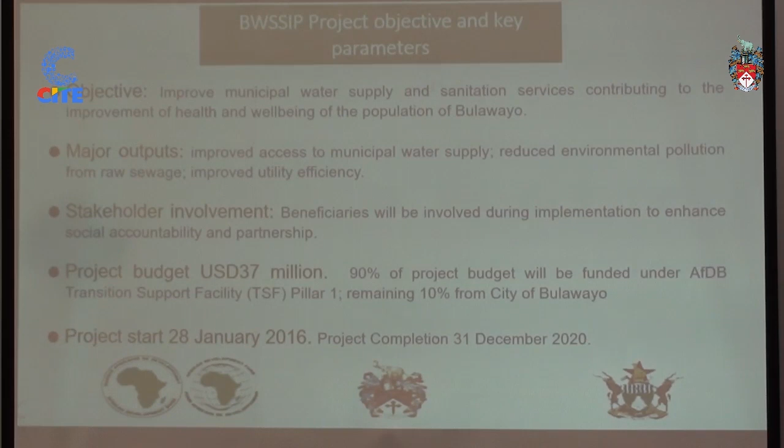The project budget is 37 million, of which 90% is contributed by the AFDB facility, and 10% is contributed by the city, mainly through our provision, mainly of offices.

The contribution is mainly in kind, provision of offices, the provision of our time on the project, like the PIT team that logs its time when working on the project. Also of major importance is the contribution by the community of Cowdray Park towards the laying of the sewers and water reticulation done within Cowdray Park. We'll get to details on that.

The project commenced on 28 January 2016, and the completion target is December 31, 2020, which is our target. So hopefully by this time next year, we should have closed this project.

The major outputs of the project include water mains renewal. I'm sure we're all aware that we continue to have serious bursts within our system. The project initially targeted 113 kilometers of water mains renewal, but because of funding constraints, that was reduced to 23 kilometers of renewal and only 2 kilometers of upgrading, mainly to meet pressure challenges especially in Nkulumane and Phumula.

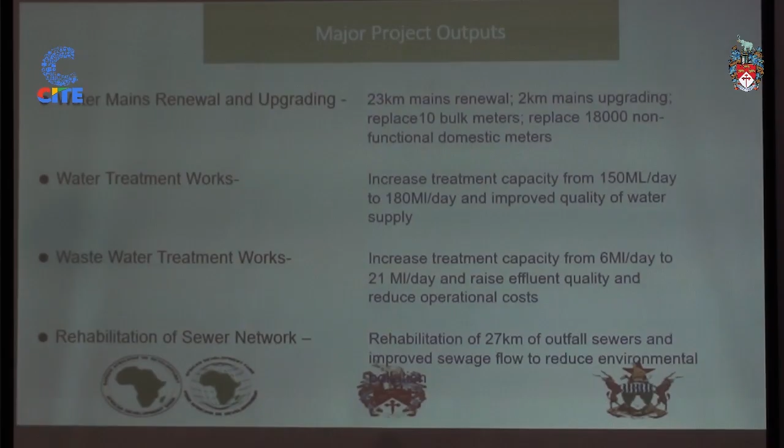It also aims to increase our treatment capacity at the area we call Southern Areas Treatment Works, Ekami, from a current 6 megaliters per day to 21 megaliters per day, and also improve operational efficiency. We're targeting the Ekami wastewater treatment works because the sewerage that goes there is actually domestic sewerage.

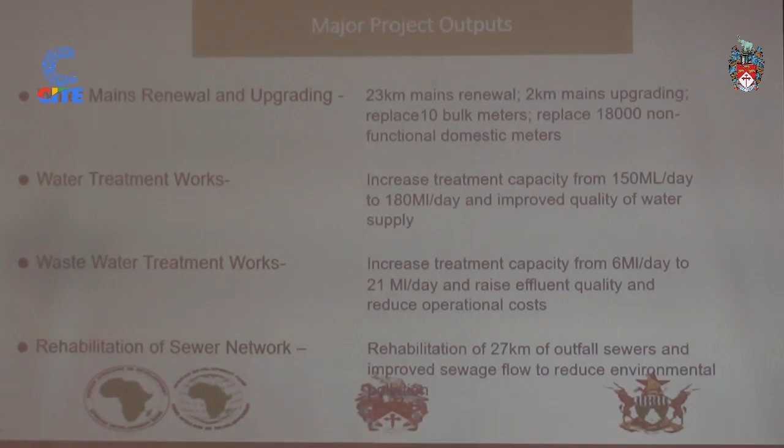There is potential to recycle these 21 megaliters of water for other uses. Within the project, a study will look at using secondary water for both agricultural purposes and as secondary water for industry in their processes. One targeted industry is the rehabilitation of the power station, which requires almost 11 megaliters of water per day. If we can harness 21 megaliters as reclaimed water, that means we will have saved 11 megaliters per day towards provision for domestic consumption.

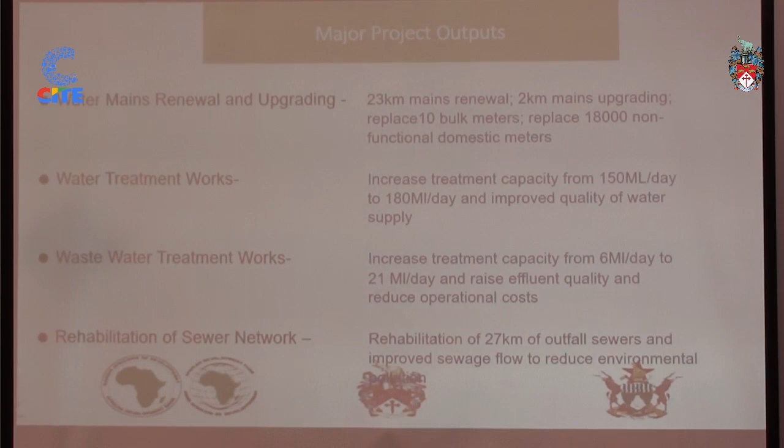The rehabilitation of the sewer network, of almost 27 kilometers of outfall sewer, will improve sewerage flow and reduce environmental pollution. So these are the major outputs of the projects going forward that we'll be looking at.

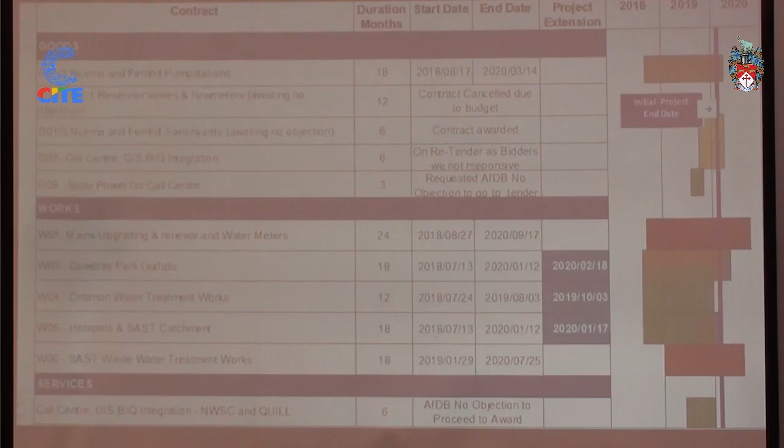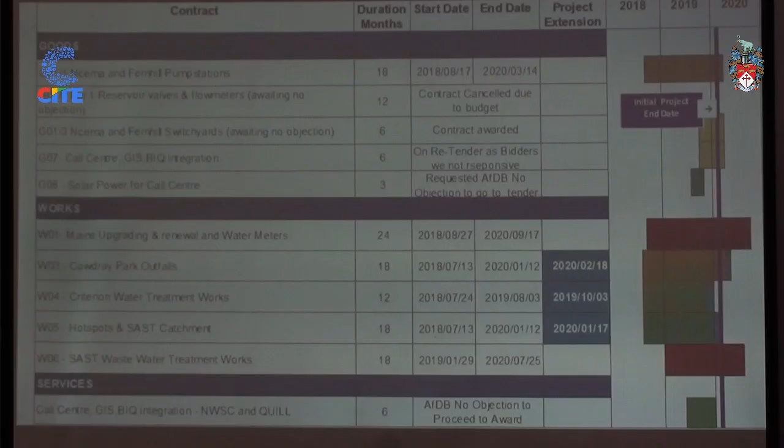Initially, the project was meant to end by 31 December 2019. What was spilling over was what was going into 2020, because that was our original target. But we're happy to say most of the contracts have been awarded. I'm sure you can see we're actually within the green and amber areas, meaning those projects should actually complete within the first quarter of 2020.

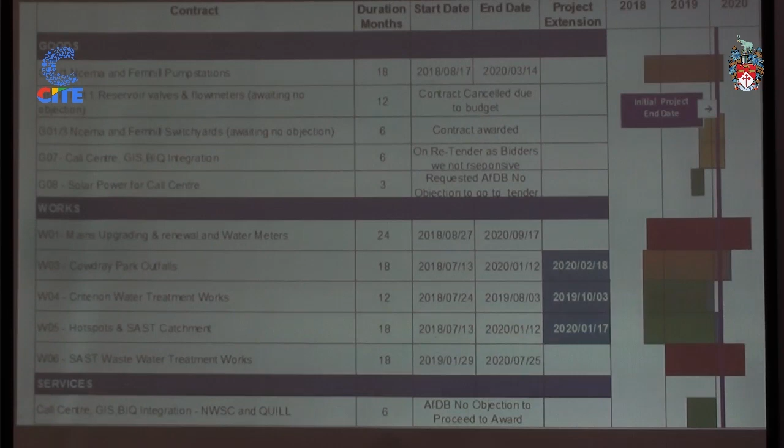The projects that are in the red will actually drag us at most to October 2020, meaning we will still be on target to close the project before the end of the project year, which is December 2020.

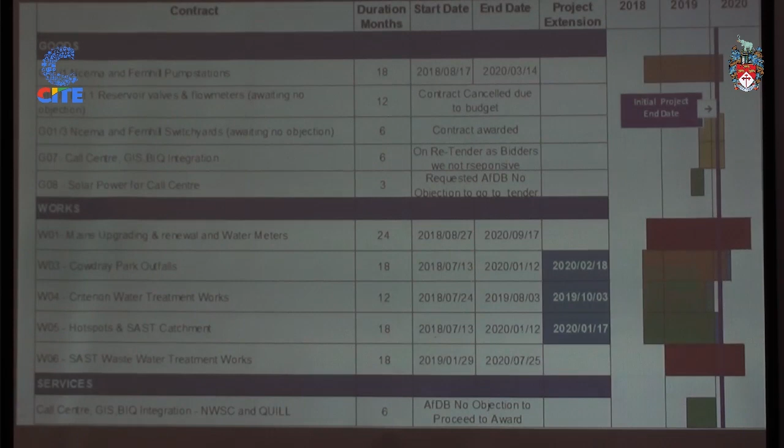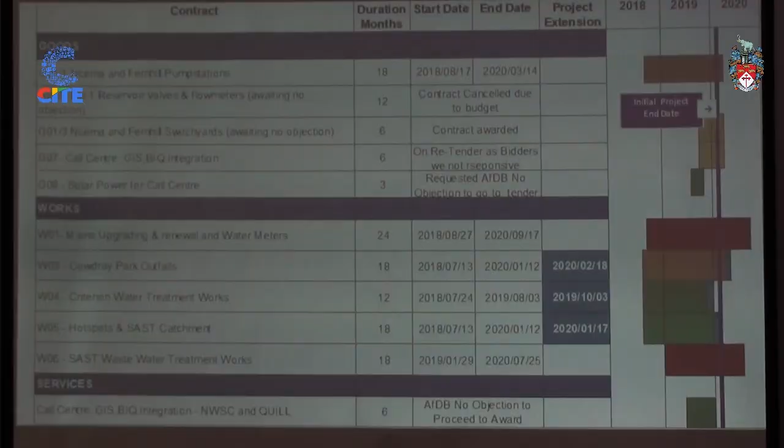G01/1 is mainly the rehabilitation of the water pumping system in Ncema and Fernhill. That was awarded, but its target completion is March 2020. Most of that work has to be done off the city because it's manufacture of those pumps, and those pumps are manufactured to specifications. We expect the manufactured pumps to be delivered before the deadline of March 2020.

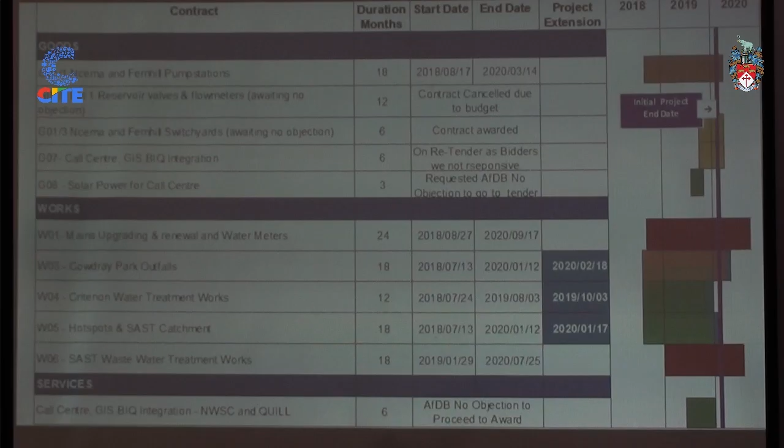The next project, where we're showing that our planned progress was 44%, we're currently at 16%. This is the water mains upgrading and renewal, and also replacement of water meters, which I'll dwell on when we come to that.

We targeted that we should be at 44%, but presently we're sitting at 16%, mainly because this is a non-revenue water strategy; we're trying to reduce the losses within the system. The project had a component where the contractor has to come on the ground, evaluate what the consultant has indicated as potential savings in terms of water losses, and confirm those studies by the consultant, which is probably why the project has taken a bit long.

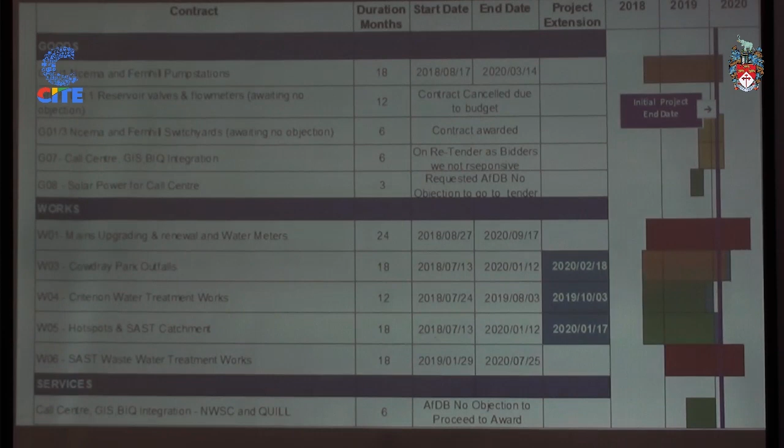But those reports have been finalized, and the contractor has been given the go-ahead to start on the implementation of the project. We expect that it will be speeded up to actually meet our completion deadline.

Then W05 is our project for hotspots in the Nkulumane Nketa area, looking at the amabhuma that we're seeing in those areas. Initially, the scope was that the project would look at the main outfalls within the Nkulumane Nketa area that feeds to Ikami water treatment works, and then do the hotspots across the city.

But again, because of financial constraints, the project was then limited to the Kami Sewerage treatment works catchment area. Hence most of the hotspots will be done in those areas, while the city, with its own internal funds, continues to do other areas using other resources, especially internal resources.

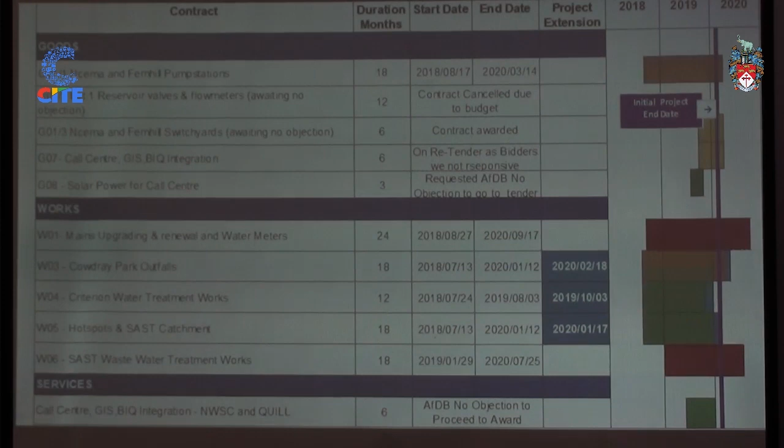Then W04 is our water treatment rehabilitation works at Criterion. That's a project that is on target, so we are almost 95% complete.

The implementation of the project will be slightly delayed. When we go out there after lunch, you will see the challenges we experienced. There have been requirements for additional works because of what was observed during the famous shutdown, which closed the water system for almost 7 days with people without water. Other works emerged that needed attention so the project is done to its full potential.

W03 is our sewer mains project in Cowdray Park, mainly to provide outfall sewers for the Hlalane Kuhle project. I've always said the Hlalane Kuhle project, compared to Gwanda, is 3 times the size. Our Hlalane Kuhle project covers 15,000 properties that had no sewer, no water, and no access to roads.

Whenever the city can get funding, those areas are given priority. Our progress should have been at 54%, but currently we're sitting at 46%, mainly because we encountered some rock in those areas.

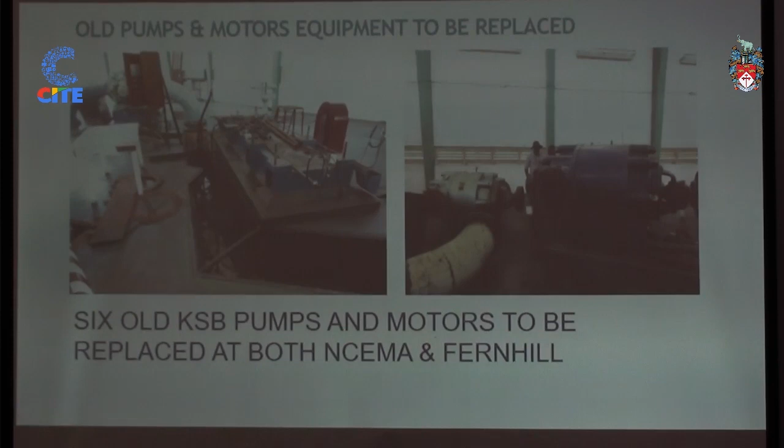Within that is also our motors and controls, meaning most of the controls there were put in place at the time the plant was built, and they are as old as the plant itself. They've never been replaced over the years, and this has been the opportunity for us to replace that equipment so we can move forward.

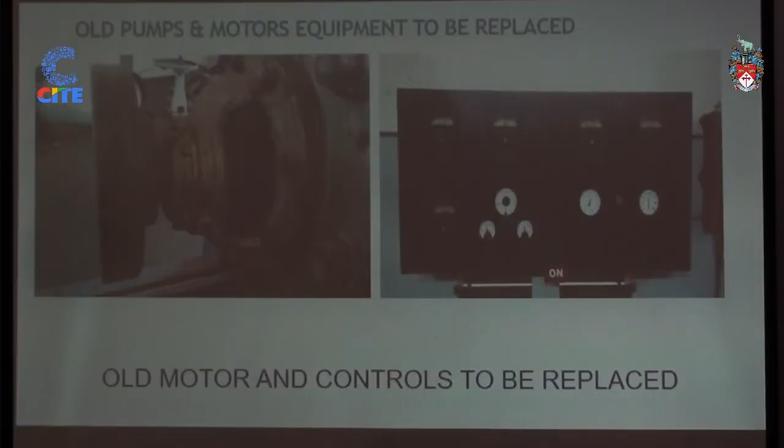We're hoping when we hold this session next time, we'll be showing new pictures of what has been done on the ground, so people see that this isn't money that the mayor and officials took and pocketed, but that we show the old machine that was there versus the new one installed, because just telling people isn't enough, they need to see it. So next year when we hold this session, we want to show you the pictures of what was there and what we delivered.

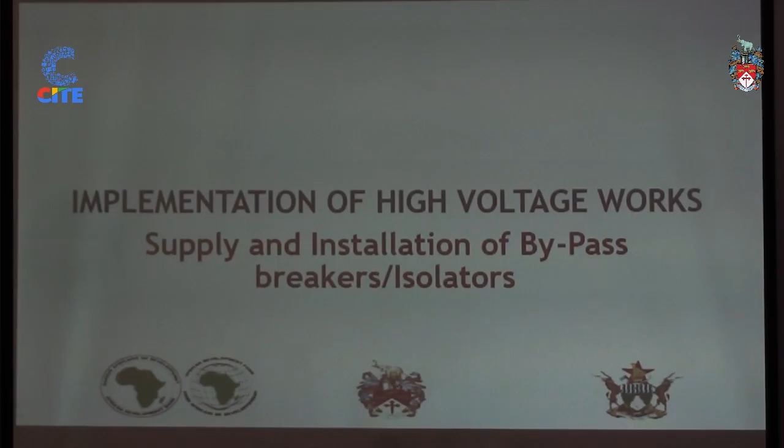Within the project, we also have to improve our isolators. Normally when we have challenges with ZESA, our pumps and motors are affected. So within the project, there's a bypass so we're able to isolate our breakers for maintenance, meaning when one breaker is faulty, we can isolate it and continue pumping using the other.

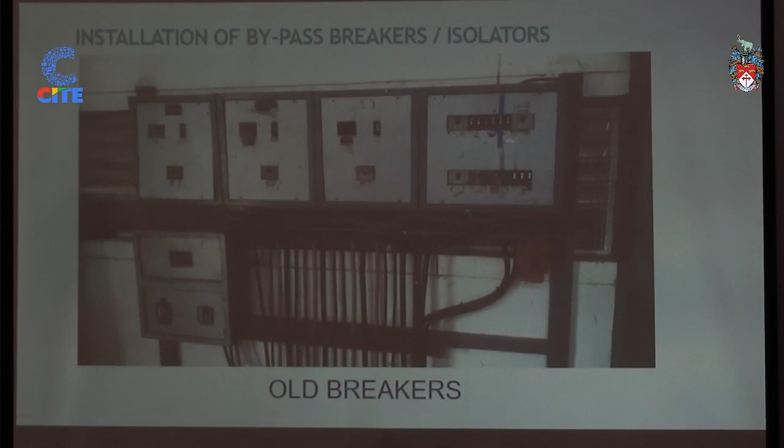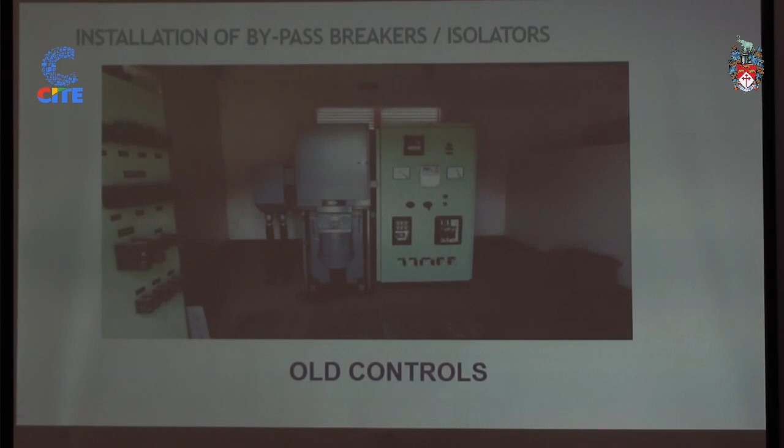Within the project scope, there's this project we call the breakers, the isolators. Again, that's equipment currently there, the old breakers on the ground, and those are the old controls on the ground, which the project looks at changing, so that when we discuss this later, we can see the movement of where we were and where we expect to be by end of December 2020.

Then the project that I talked to was the water mains upgrading. Again, in this project, we said we will be doing surveys in the areas that are actually affected by the project, and those people that are within what we call the Magwegwe and Criterion Reservoir areas.

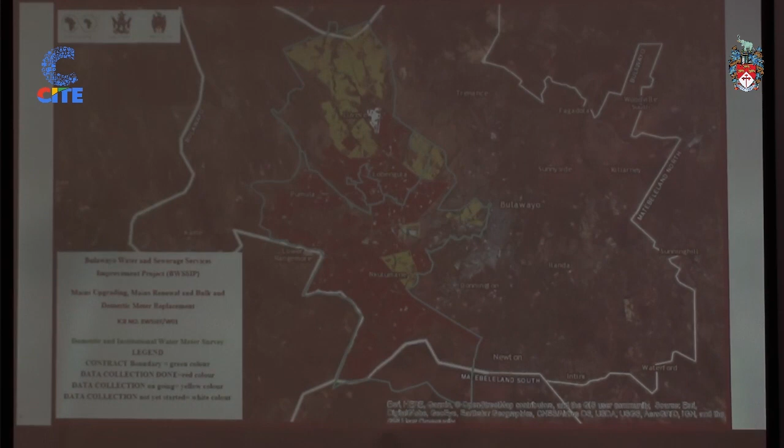We can say we've made some good progress on that, but people refuse to give their numbers. You know, people were not willing to give us their contact details.

But all those things actually were saying we need information about our customers. And when we are going forward, we are expecting that we should be able to say I've got a burst in this area, and by an SMS, people can phone in about it, saying in this area I've got a burst and the water will be shut down, without having to make a public advert.

So when we're asking for that information, we are not saying that we use it just to shut down water. We use it for even communication. I think that's the reason why people were not willing to give us information, because they thought we just want to use it to harass them about unpaid bills and all sorts of things. But it's trying to enhance communication between us and the stakeholders going forward.

So the area that we are showing there is actually the area where we are doing the door-to-door assessment of our meters and getting the customer data. And this is mainly funded through the project.

I think these are just the data collection teams that I was talking about. The non-revenue water study, logging to check what our flows are on the ground and what is happening during the night in terms of water pressure.

Because the reason why we always have high losses is that our pipes burst at night. No one has seen a pipe breaking. Every morning we only find the drainage is now flowing. It's because our pressure at night is very high.

So some of this data logging is actually to identify those areas with very high pressures so that we can put in devices that will manage pressure automatically during the day and during the night and minimize the losses that will actually be getting on that. So those are the teams actually working on the ground doing that data logging.

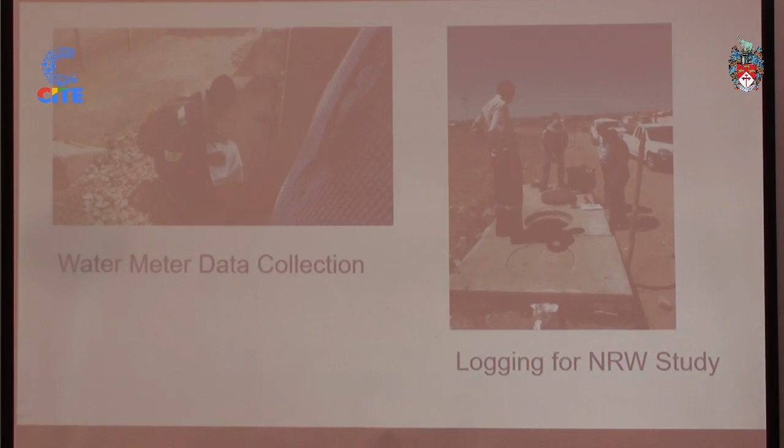And as you can see, those are the data collectors. The data collectors, we tried to make them community-based. They were actually employed from within the communities. I know we should have wanted to employ in each and every ward that we were reading, but there's quite a lot of training involved. So those that we trained were actually used throughout the project.

As a city, we said we should learn from this project, and we internally covered almost the whole of the city. So almost throughout the city, we've done data collection in terms of our working and non-working meters and those that have been vandalized. We now know where there are vicious dogs and razor wires where we cannot go in.

All that information allows us to interact with stakeholders to say, if you have put in a razor wire, please by this date give us your meter reading, so that one day we can come when you are there and open the gate to see whether your reading is true or whether the meter is working. We have tried to harness all this data within the project, both internal funding and funding from the African Development Bank.

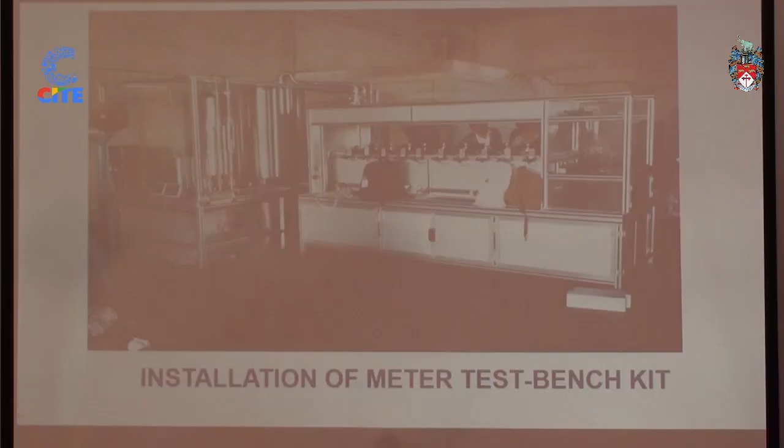The meter is actually what we consider our till. So the accuracy of our meters is very key.

Within the project there is this meter test bench that has been bought and installed. So those 14,000 plus meters that have to be installed on the ground will all have to go through this test bench, so that we reject those that we don't believe will meet our standards, and we implement those that we actually want to use on the project.

Then the outfall sewers in Cowdray Park. The slide on my right shows the outfall sewer network that the project will have to work on in terms of the outfall sewers that need to be done, and the contractor is already on the ground on that.

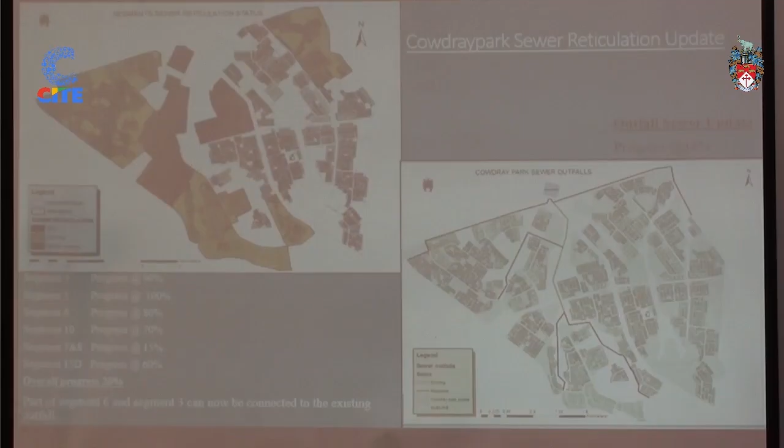On the top corner of my slide, it shows the extent of the sewerage coverage within those 15,000 properties that we said are under consideration in Cowdray Park. The yellow shows where no sewer is there and the area is already built up.

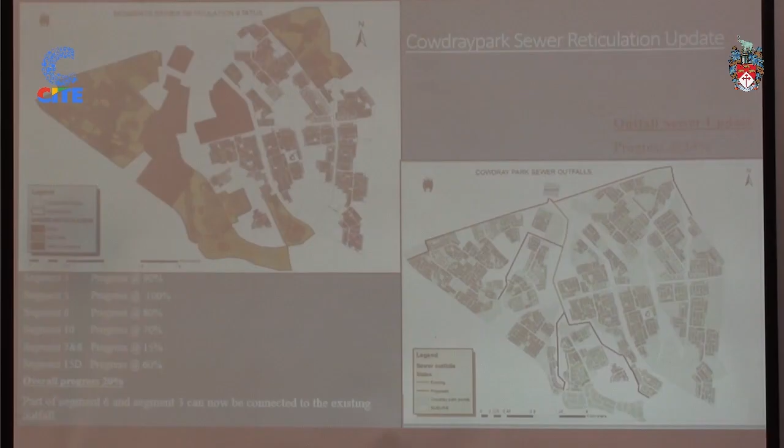As you can see, the yellow area shows areas still requiring sewer. Unfortunately I didn't have my slide to show the picture in terms of housing development, but almost 80% of those areas now have properties built almost to roof level. So the contribution the city is making is the work that will come from laying those sewers.

The current project is such that the beneficiaries are contributing towards the contractor and the purchase of materials in those areas. Like I said in the previous slide, in terms of water reticulation, the BWSSIP project provided the water reticulation pipework and also the meters I've already referred to.

Being outfall sewers, they are away from the houses, but we've had a few incidents where when the contractor was blasting, rocks flew and hit the roofs. So you can imagine when we are digging 1.5 meters behind your house to lay the sewer - it's a challenge we will have to work on, maybe finding other technologies that address that.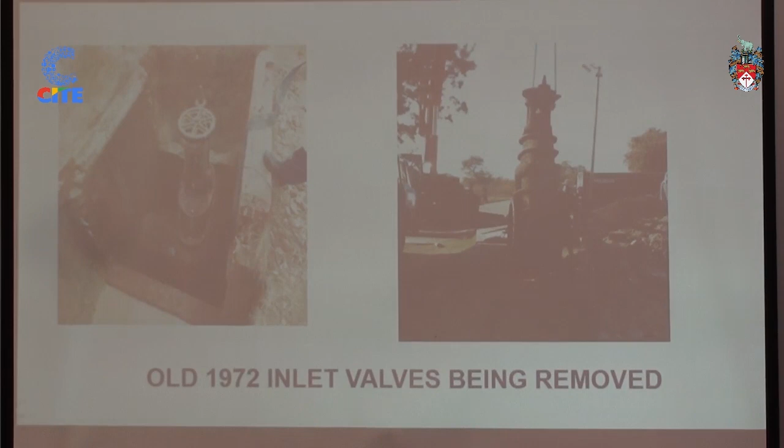Criterion waterworks, I have referred to that, and this is the work probably that we will see in the afternoon - but by the time you get there, you won't see the old valves. Here we're just illustrating that we did remove the old valve. We didn't refurbish it, we took it out. We'll be sending it for auction, for scrap, so that we know it was taken out and a new one put in.

In Criterion, we have installed the new distribution boards. The picture on the right shows greens, ambers and blues - that's the new equipment at Criterion, where looking at that screen you can virtually understand what is happening throughout the whole works within the system. On your left is the old board that we had, so you can see what we took out and what we've put in.

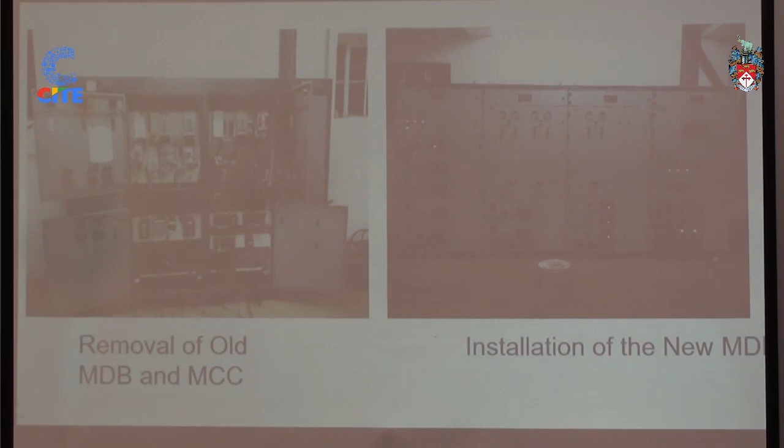And all these works were actually done within the 3-day shutdown period that we are working on.

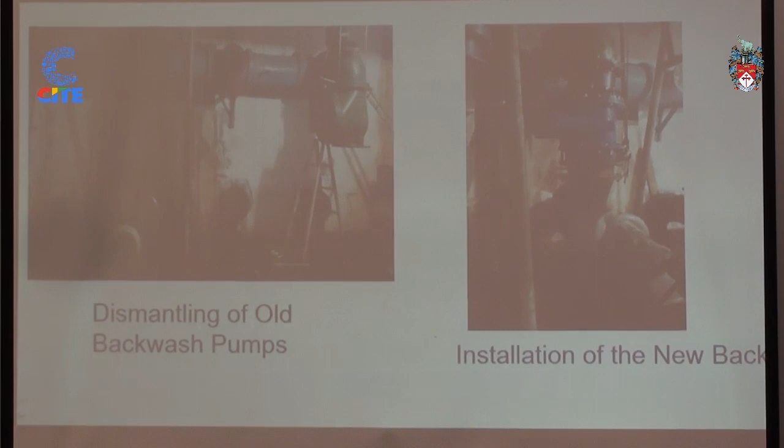The next task was our backwash pumps, where we had to dismantle the old ones and install new backwash pumps. We had a challenge during installation because the valves that were meant to be closed while works were halted allowed water to come into the backwash pumps, creating a problem during that shutdown. So within the scope of the variation orders, we're replacing some of the bypassing valves that allowed water to enter the backwash system during rehabilitation.

All this work was done within a 3-day period. We have an opportunity to look at that when we visit the works. Then there's the rehabilitation of the outfall sewers in the SAS catchment and the hotspots I mentioned earlier, SAS being Khami Sewerage Treatment Works, where we're targeting recycling some of the water. Within the current project, there's a study looking at the potential use of recycled water for industry and urban agriculture.

For the hotspots, the contractor and consultants have identified various areas where we need to deal with these problem spots. The hotspots are areas where sewage flow is consistently slow.

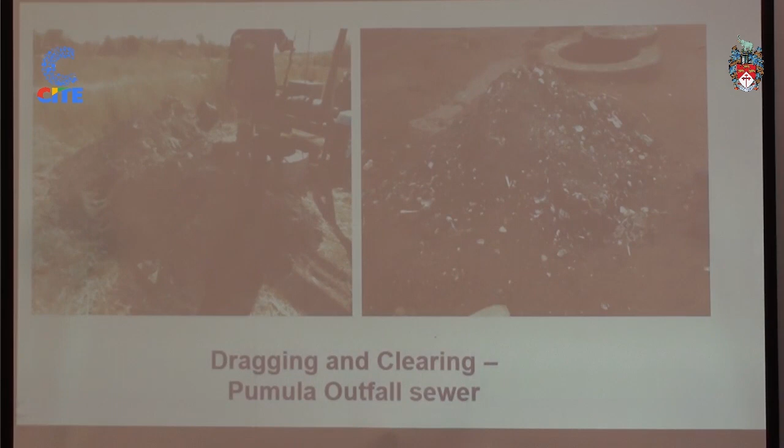And we work on a program to actually install those gully traps and gullies around the houses, so that cleaning can happen without affecting what goes into the sewer system.

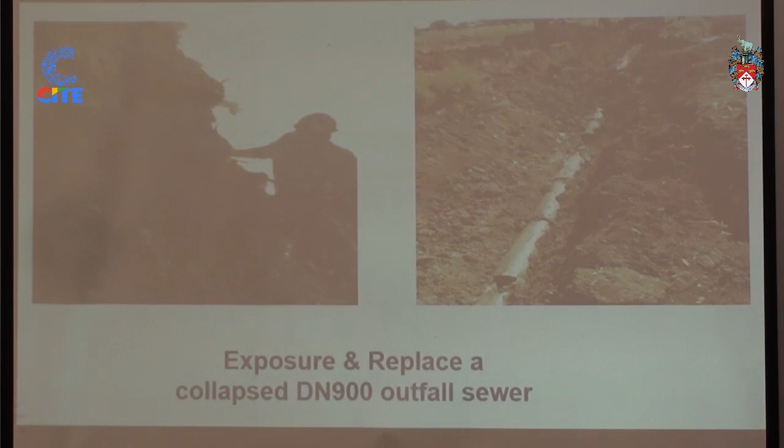So this is the work that we are finding in your sewers when we start. This is what is happening on the ground. These are the works that are currently going on where we are actually removing those lines where they have collapsed, and putting in new ones. That's a new pipe that has been laid in some sections of Pumula.

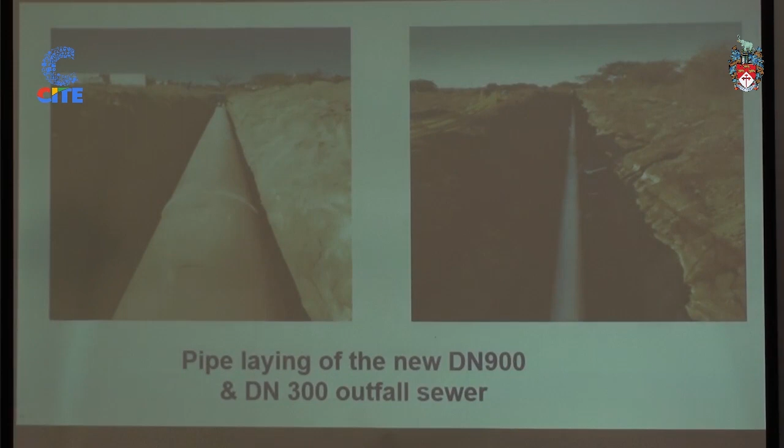So probably we need to start thinking what we can do to actually look at those alternatives, because the realization is that people need this water.

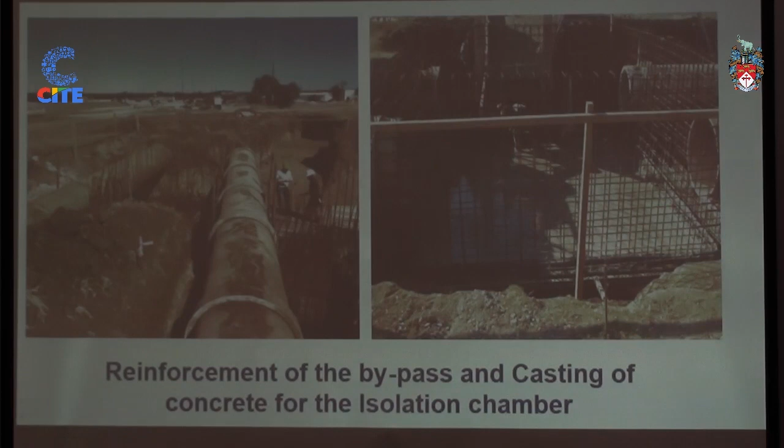These are the works at the southern areas treatment works, which are already ongoing. This was before rehabilitation, and these are the bypasses so that we are able to work within those areas. These are the chambers being done for isolation of these flows as they come in. This is work in progress already at southern areas sewerage treatment works.

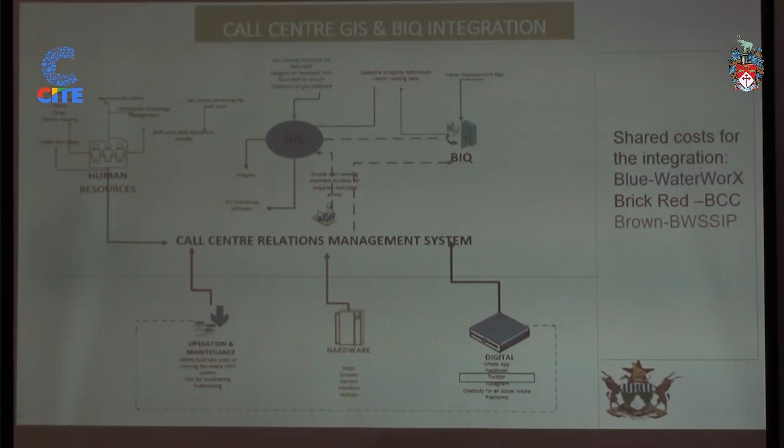So within the project, we also want to improve on our customer care, which is where we want to manage our customer relations. And this is exactly what we were saying: we wanted the interaction between ourselves and the communities, information about who stays there, what are the contact details, so that within that system we're able to actually serve you better. It's not for tracking you, but it's to serve you better.

So we'll be combining, within the scope of the project, our GIS, which is mainly the mapping of the city in terms of stand properties, with our accounting system, which we call the BIQ.

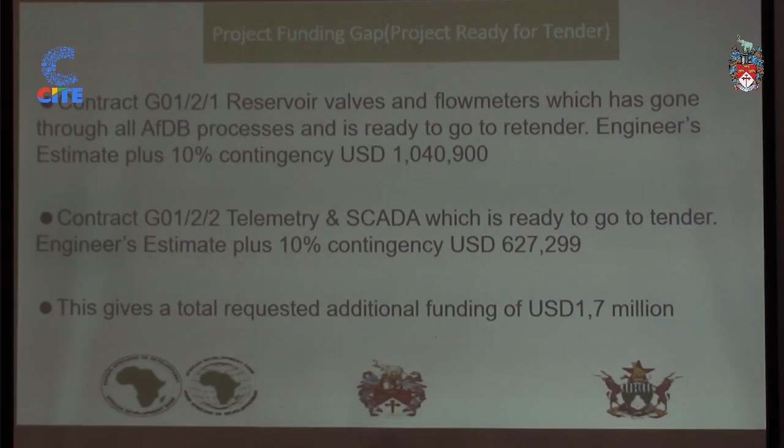There are projects that were ready, went to tender, but because of resources that were available, we're not able to award. Mainly the reservoir valves and flow meters, which were estimated at almost 1.1 million to do. This was looking at replacing all our inlet and outlet valves at our reservoirs. We have almost 7 distribution reservoirs within the networks which are almost due for replacement. We struggle to close them and we struggle to open them.

We're worried that one day we'll try to open one and it never opens, especially during load shedding. Some of our valves, because of that, are now in need of emergency maintenance. The other one was the telemetry and SCADA, which will talk to our reservoir levels and what is happening within the reservoirs.